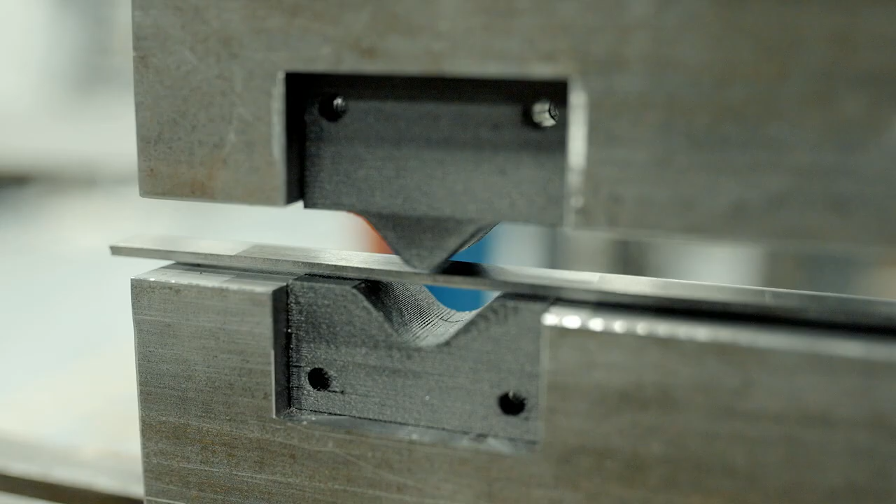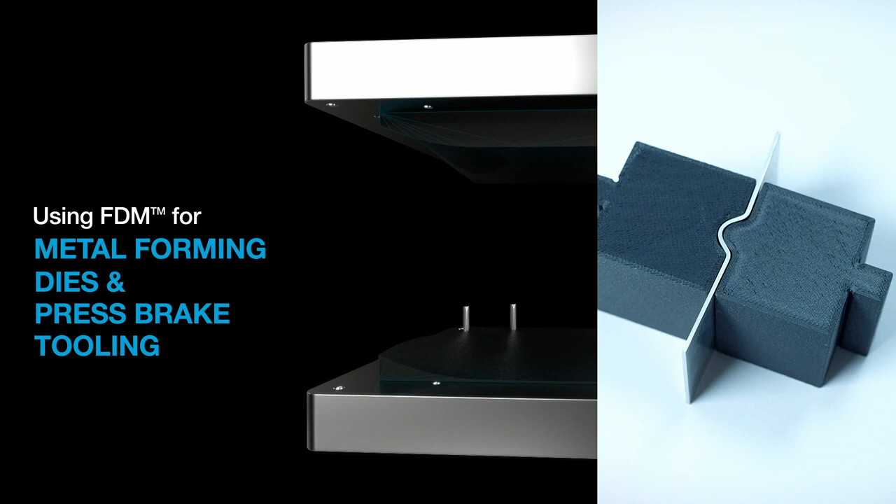I'm going to show you the benefits of using FDM 3D printing technology to make metal forming dies and press brake tooling, and then I'll show you what's involved in designing them.

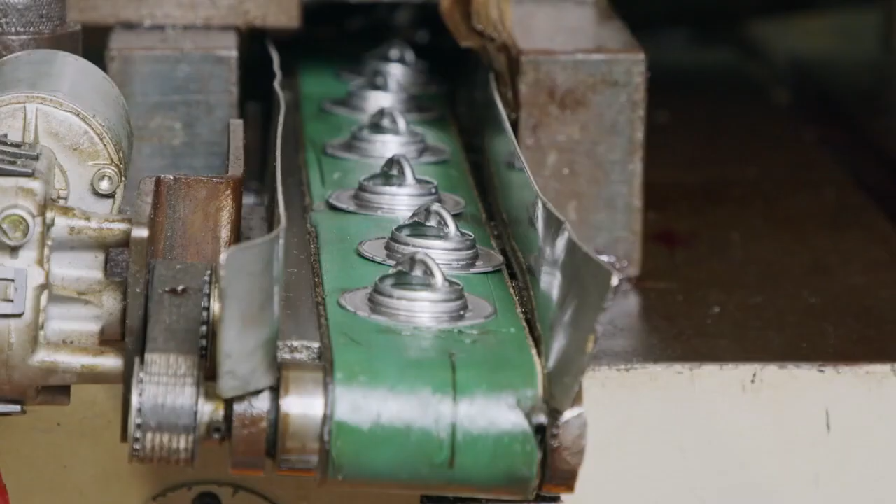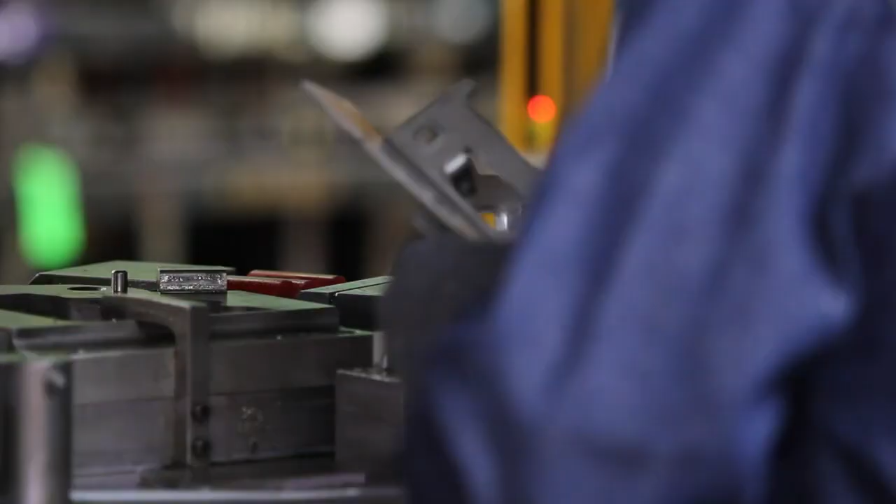Typically, metal forming dies are used in the manufacturing process when thin, relatively simple sheet metal parts need to be made at scale. Most of the time, these dies are machined from tool steel, which is time-consuming and expensive, especially for low-volume production. Sometimes revisions are made to the tool to account for changes needed after fit and function tests, requiring additional machining that adds time and cost to the overall project schedule.

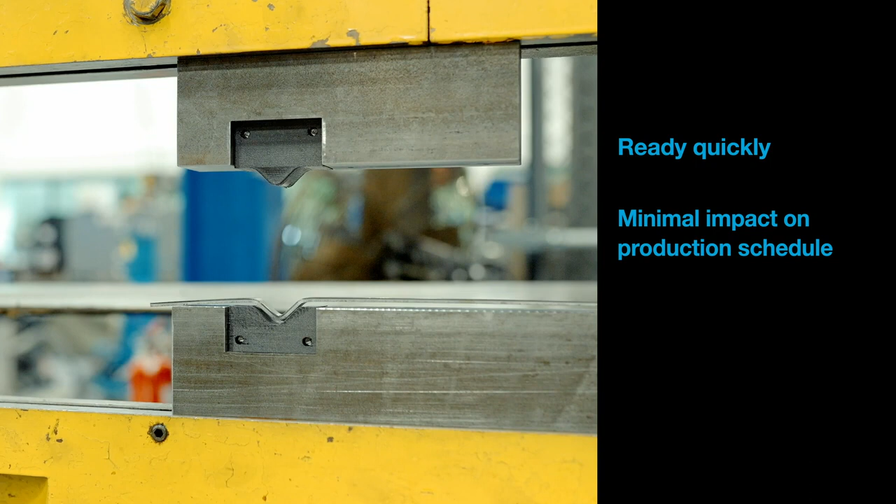FDM 3D printing is a great alternative to machining, especially for highly complex shapes, low-volume production, and to keep production running when tools break, need to be replaced, or require updating. FDM 3D printed forming tools are ready in a very short time with minimal impact on the production schedule, giving you control when your supply chain is disrupted.

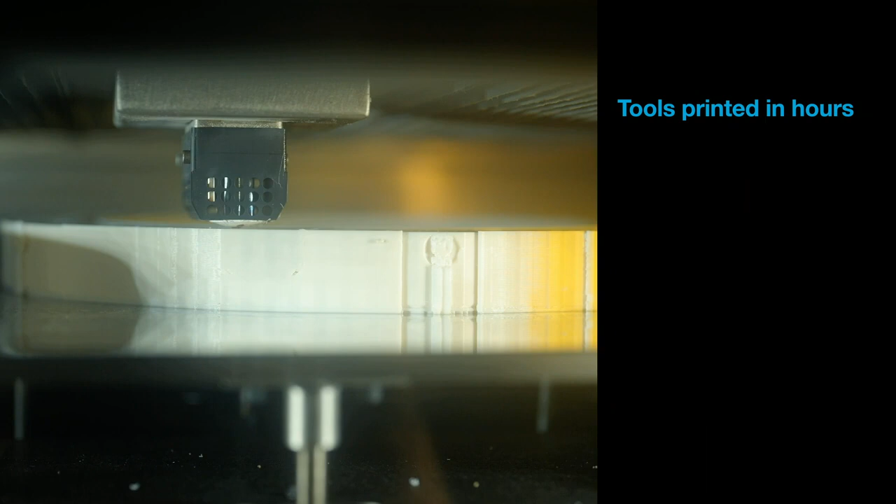So the main benefits of 3D printing these tools are speed, lower cost, and design flexibility. Tools can be printed in hours instead of weeks. Cost is lower because you're only paying for the material used to print the tool.

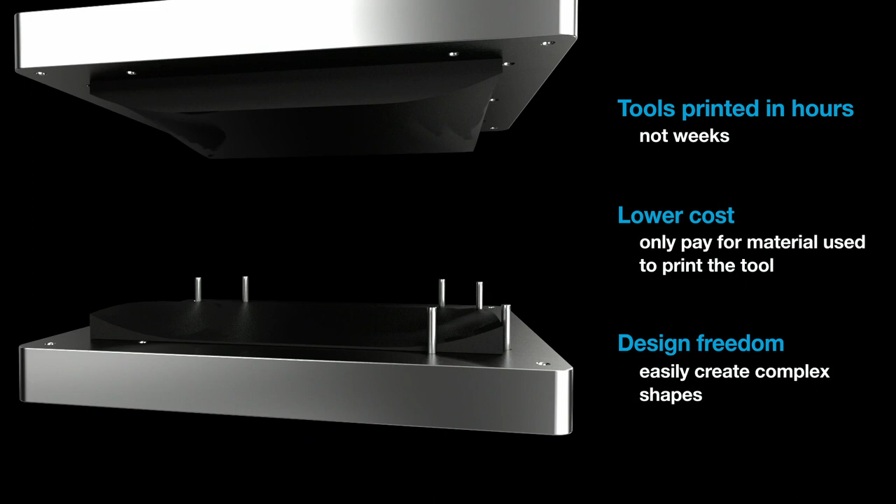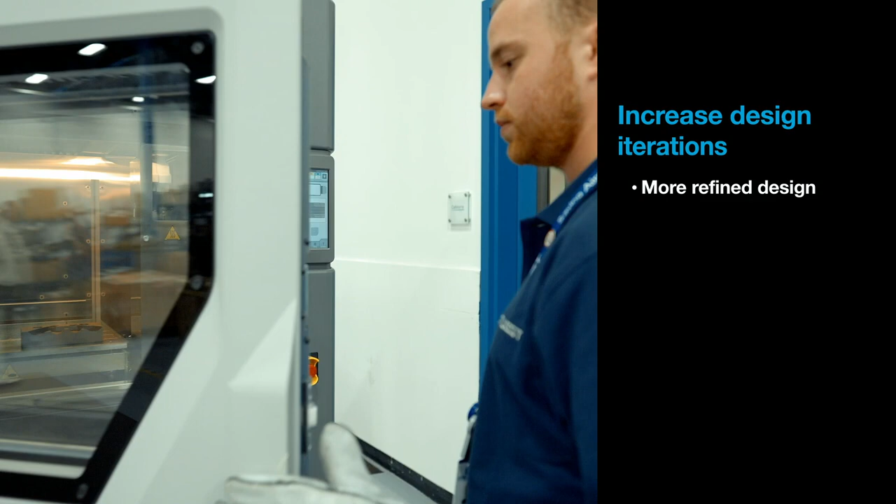3D printing's design freedom, using Stratasys support material, lets you easily make complex tool shapes that may be difficult and time-consuming to machine. Additionally, by utilizing FDM 3D printed tools, you can increase the number of design iterations during the development process, leading to a more refined final design in a shorter time period and at a lower cost.

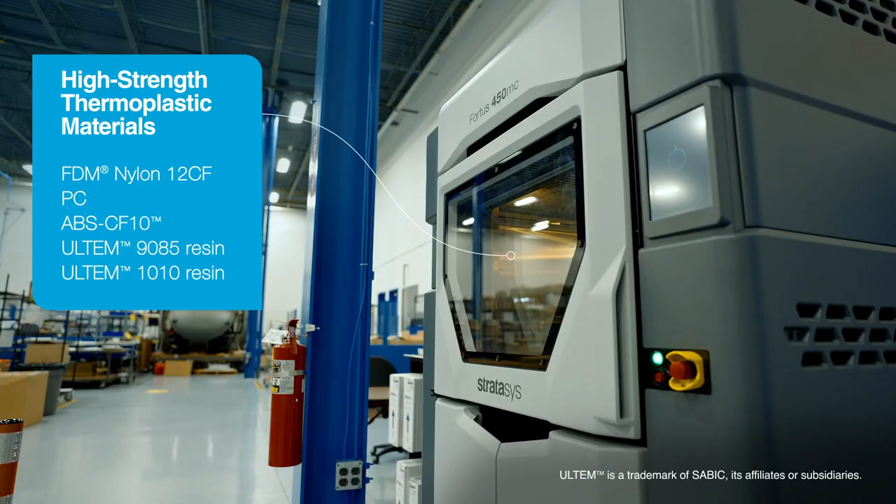Based on the requirements of your forming operations, Stratasys has several high-strength thermoplastics available to choose from. Here are some considerations when designing your 3D printed metal form and press brake tooling.

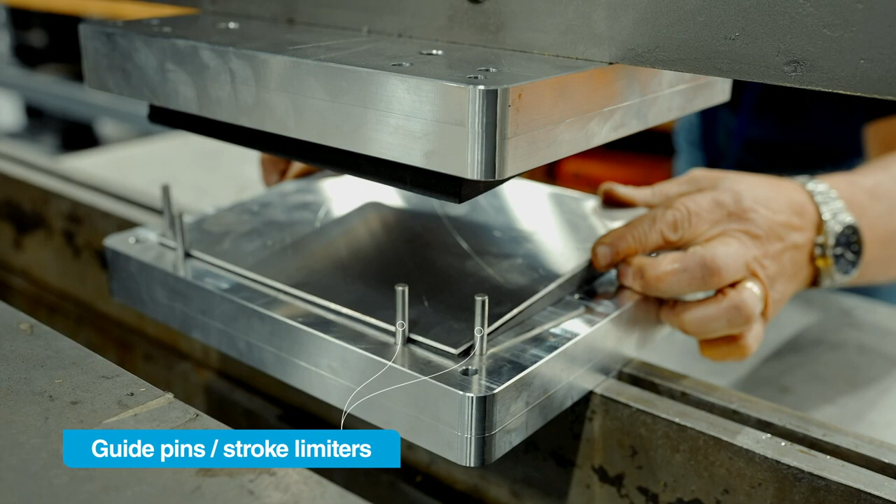Create your tool using the same design philosophies used when designing metal tools. Be sure to include guide pins and stroke limiters where necessary to prevent tool damage. It's preferable to make the tools as a single 3D printed part to prevent weak spots.

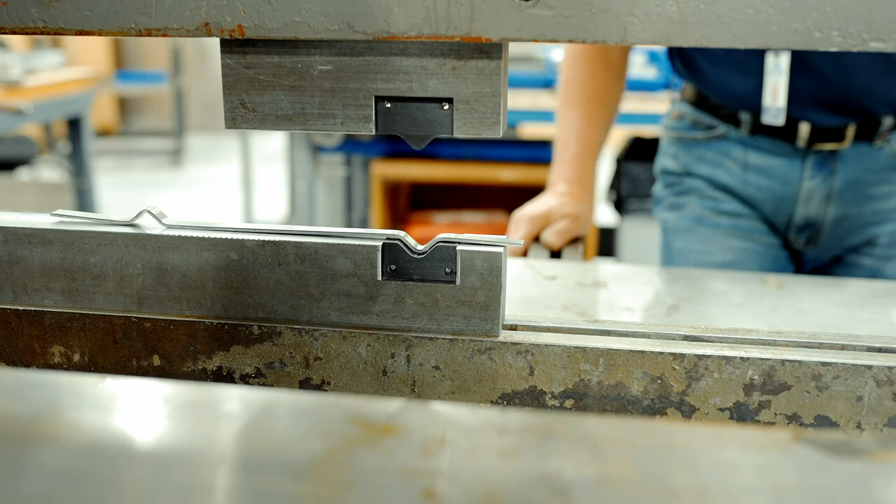Under the forming pressures, an FDM tool may have a small amount of deflection that decreases or eliminates the amount of springback in the sheet metal component. We recommend designing your tool with no springback compensation and adding it in, if necessary, after testing.

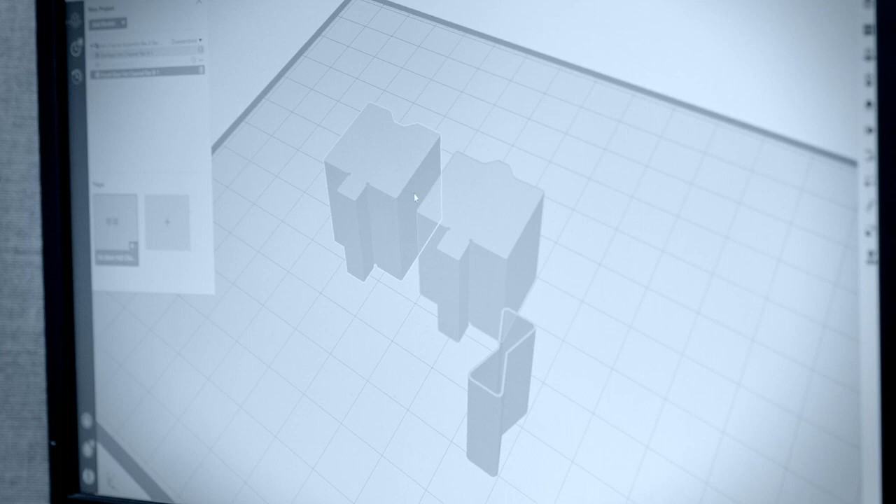Part orientation is important because it affects the compression strength of the final part, and it also affects surface finish of the tool, which could transfer to the formed part depending on gauge thickness. It's best to print tools with solid infill and multiple linked contours in order to increase strength.

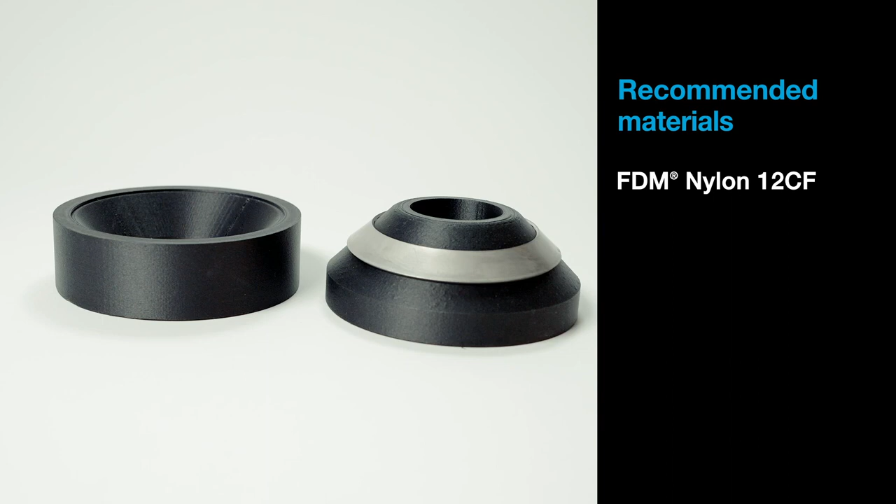It's important to match the material to the requirements of your forming operation. Our recommendation for materials are FDM Nylon 12 carbon fiber, polycarbonate, ABS CF10, and Ultem 1010 and Ultem 9085 resins. Please refer to our material data sheets when choosing your material.

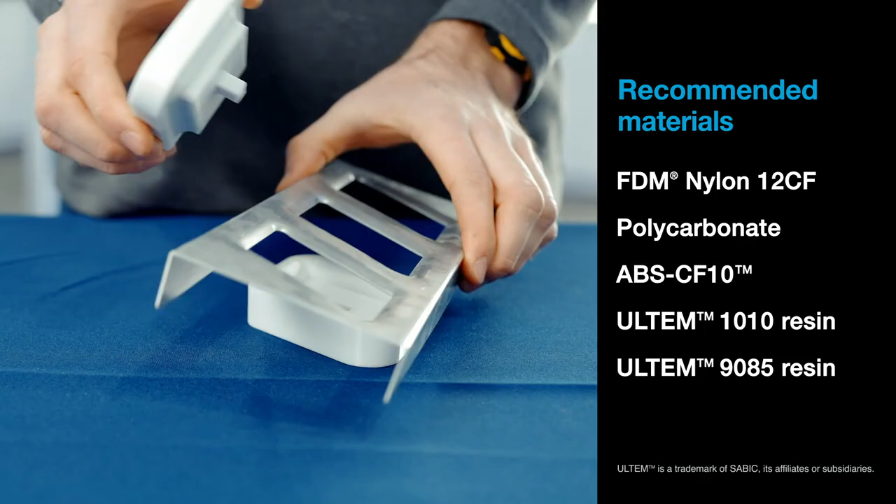3D printing metal form tools with FDM technology isn't difficult and offers multiple benefits over making them with traditional methods. To learn more about this application or other 3D printing manufacturing solutions, contact your Stratasys representative or visit stratasys.com.